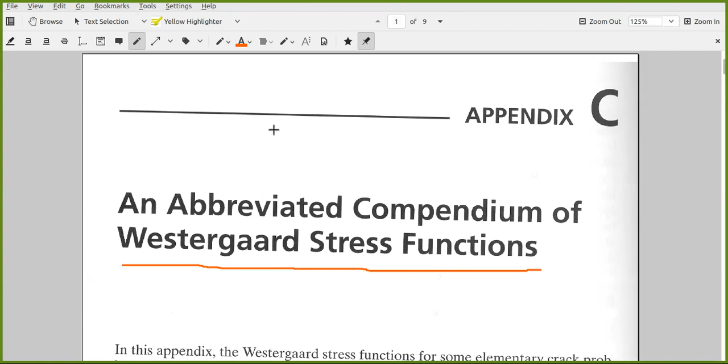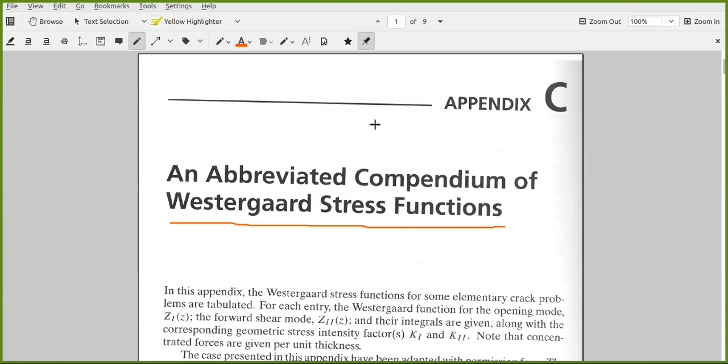There are solutions for different types of crack problems here, and you can use these functions to derive full stress fields. From the outset, we have talked about inverse method or inverse solution, and the functions were derived so that they satisfy the boundary conditions for appropriate Airy stress functions. And then you can use these to calculate stresses at all points in the complex plane. And certain idealized geometries are also included.

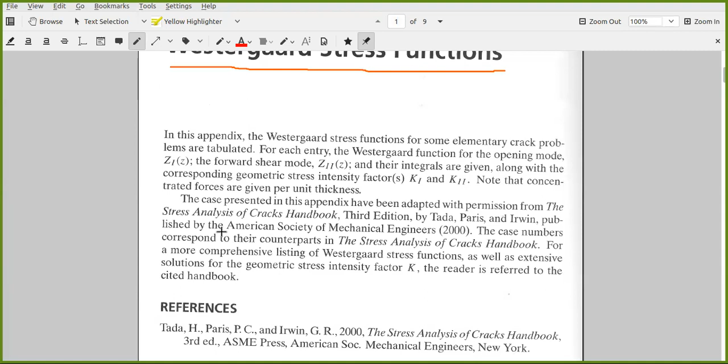It starts with this here, referred to as case 3.6. Again, an infinite plane containing a semi-infinite crack under crack face loading. Loads or forces per unit length are applied on the crack faces. They can be applied separately. For example, if Q equals 0, there is mode 1 loading. Crack face force here is P. And what's the Westergaard function for mode 1 loading?

It's given here, Z1 equals 1 over pi P times 1 over Z plus B times square root of B over Z. Now, this is sufficient. This single function is sufficient to find all stresses and the stress intensity factor at the crack tip and the displacements. In the homework, you will work on such derivations. But if P equals 0, then you have mode 2 loading, a shear force acting on the crack face, and the Westergaard function is Z2, and this Z2 will define, again, all quantities. All full-field quantities and asymptotic quantities, everything is known once the Westergaard function is given.

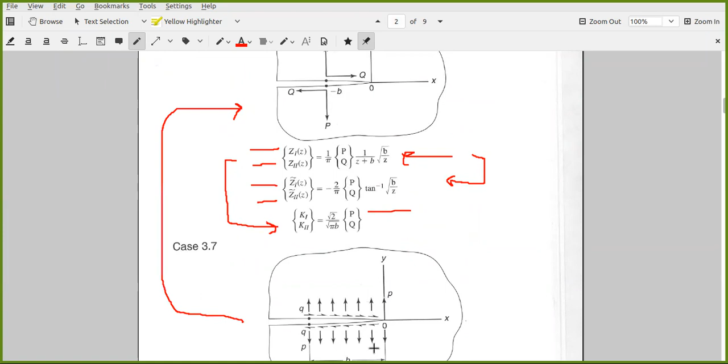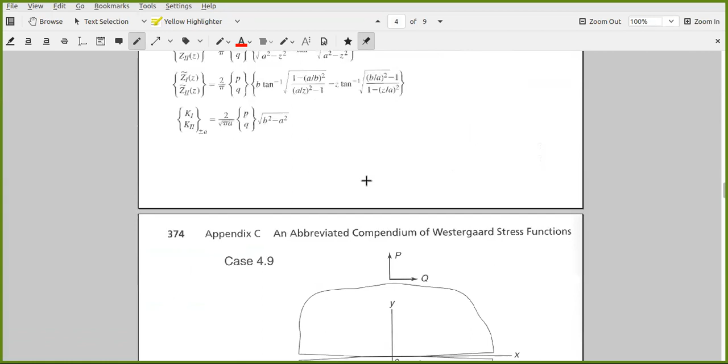And find these different cases, distributed loads. It's theoretically possible to find this case from this case, because it's a Green's function for this case, but distributed load multiple or double cracked specimen, let's consider the other cases, internal cracks. This is a crack under remote moments. That was the problem we have dealt with.

Crack in infinite plane, under normal stress or shear stress. If it's under normal stress, the problem is mode 1. If it's under shear, it's mode 2. Westergaard functions and stress intensity factors, sigma square root of pi a, tau square root of pi a. A basic problem in fracture mechanics.

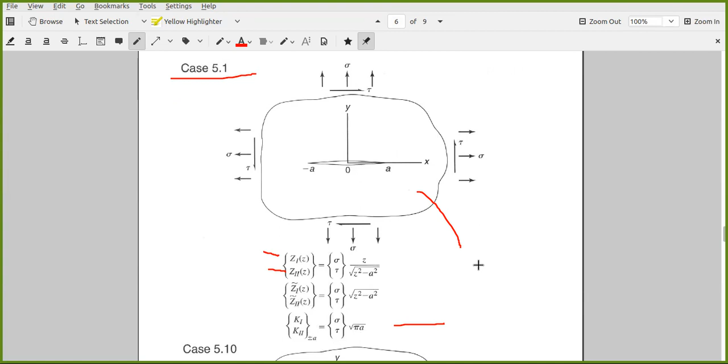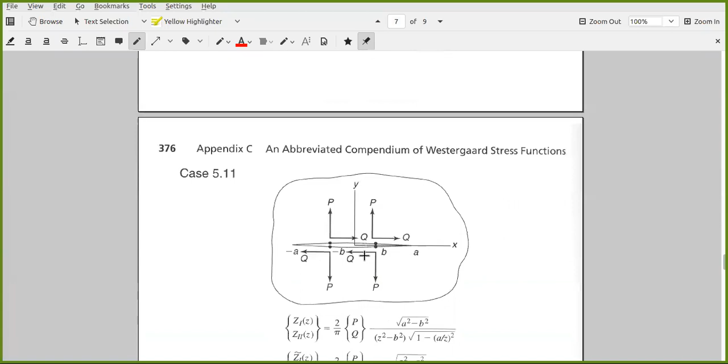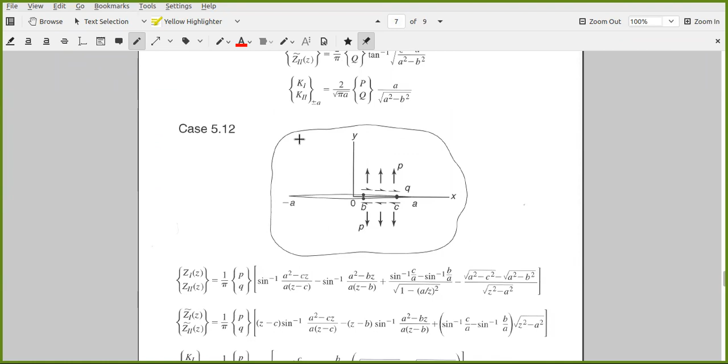Now, you can examine these other cases as splitting forces acting on the crack face. Double forces, this is in the homework. Distributed load on crack surface. These are crack surface loads. They could be useful in examining limit loading problems as well. If we have time, we can cover the Bueckner's principle.

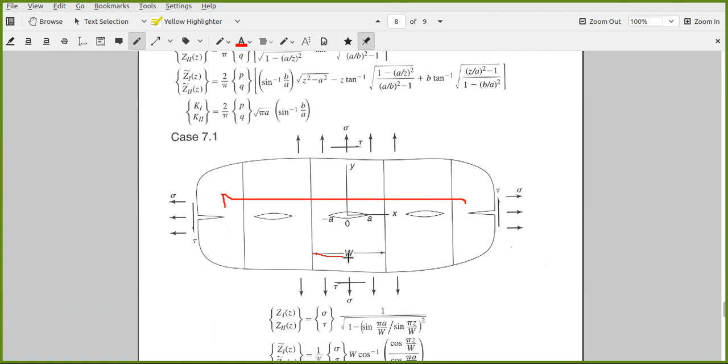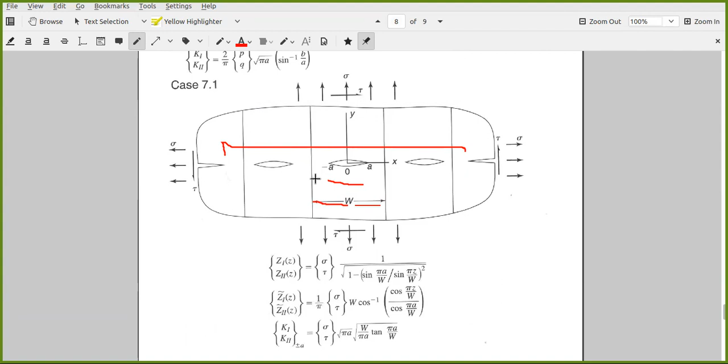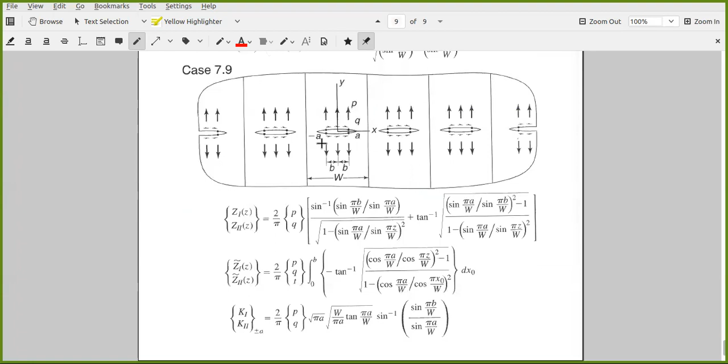Periodic cracking. This is periodicity W, full crack length 2A, and so the cracks are interacting here, and this will cause somewhat larger stresses and stress intensity factors. Periodic cracks with concentrated forces, and you can examine these yourself, given in the book. And if the Westergaard function is given, the good part is that you'll be able to find full stresses or asymptotic stresses, whichever you want.

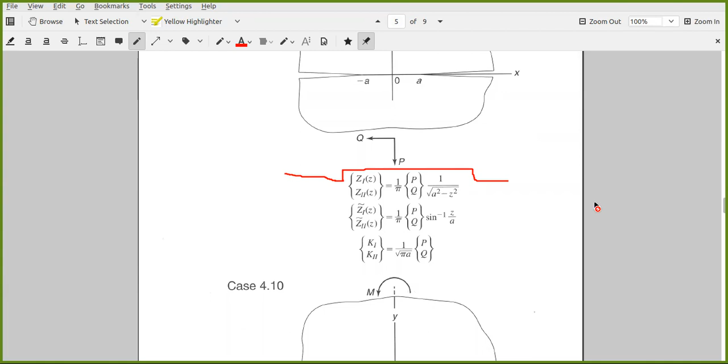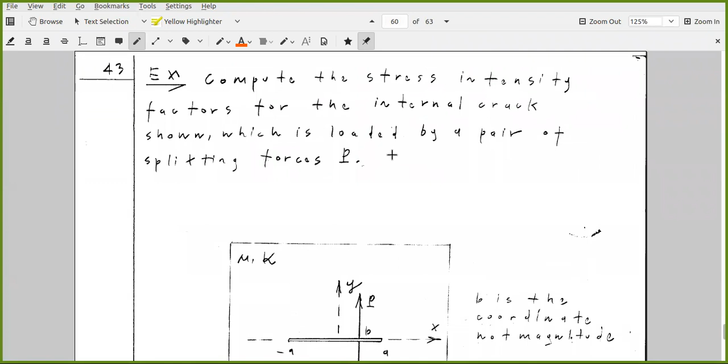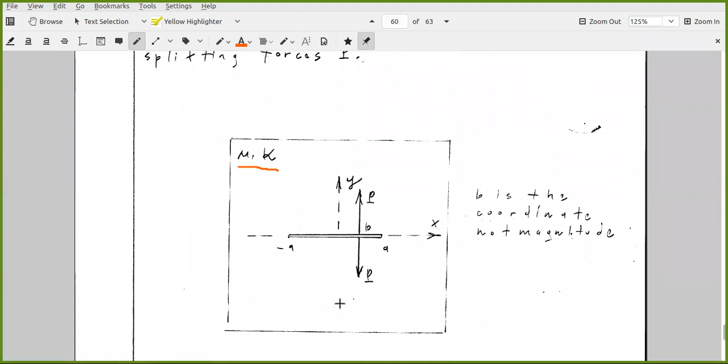An example on the application of the Westergaard method. An internal crack in an infinite medium. These are the elasticity parameters, mu and kappa, loaded by a pair of splitting forces at x equals b. B is the coordinate here.

Crack face loading, referred to as crack face loading. Concentrated forces are applied on the crack face. What are the stress intensity factors? That is the question. Derive the stress intensity factors.

But one thing you should notice at the outset: are the stress intensity factors equal to each other? Stress intensity factor at x equals a and minus a. Are they equal? That's the question. At the crack tips, are the stress intensity factors equal? They are not equal because the loading is not symmetric. Which means that you have to find separate stress intensity factors for a and minus a. And how can we do this?

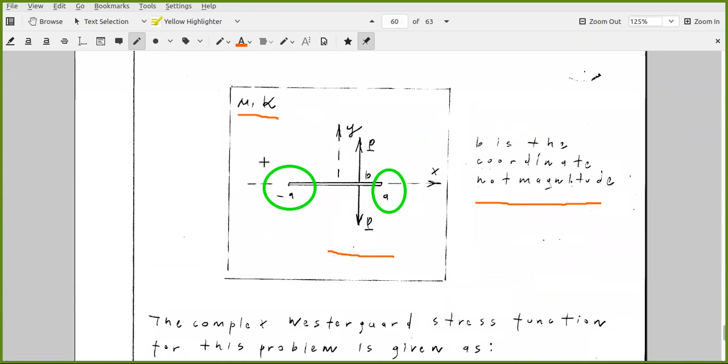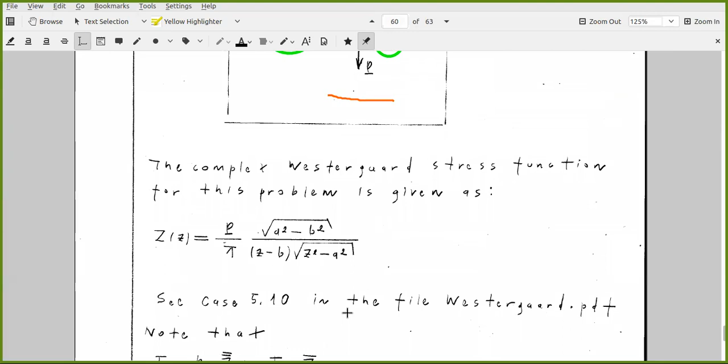For the inverse solution, this is case 510, not 511, not the double force, single force. Case 511 is in the homework. Yes. Case 510 in the Westergaard compendium of stress functions. And this is given, therefore, in the book by Sanford.

Let's choose the correct marker. The Westergaard function, Z equals P over pi, square root of a squared minus b squared, over z minus b times the square root of z squared minus a squared. This is available, and that could be your starting point for a mode 1 problem. We did all these derivations.

The stress function phi is real Z double bar plus y times imaginary Z bar. Sigma y was calculated as real Z plus y times imaginary Z prime. These are analytic functions defined in the material plane that is constructed as the complex plane. Now, it's necessary to know the stress distribution on the cracked plane, y equals 0. And we know how this is computed on the cracked plane, equivalent to the square root of x squared minus a squared for x greater than a, minus the square root of x squared minus a squared for x less than minus a.

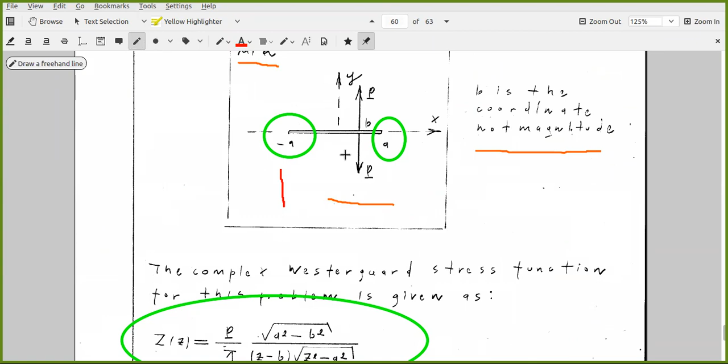Procedure: right now it's an algebraic procedure. Substitute this into the definition. Carry out the simplifications. And after a final simplification, you will find K1 at minus a. Stress intensity factor at a and at minus a. Now, what's the common feature here? If b equals 0, then they have to be equal, because if the splitting forces act at the origin, then stress intensity factors are equal because of symmetry, and you can see that by substituting 0 for b.

We can easily show that K1(a) equals P over square root of pi a. A somewhat simple result.

An interesting feature of this loading is that as crack length becomes larger, there is a drop in the stress intensity factor. It is not like remote loading. Stress intensity factor is getting smaller and smaller as the crack length becomes larger. Because the crack tip is moving away from the force, so that's probably the reason.

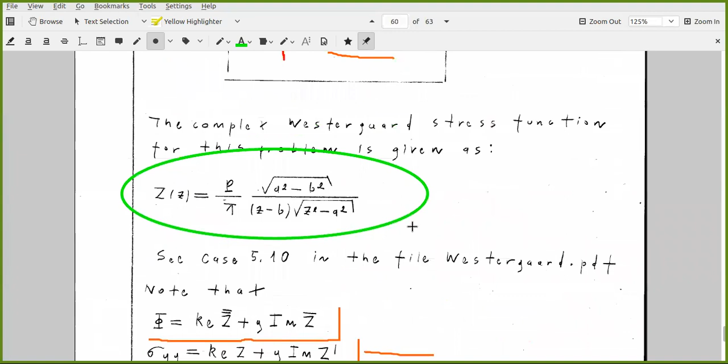Any questions about this derivation? And this shows that if for a certain geometry the Westergaard function is known, the problem is already solved, but you should know the relations between different unknowns to be able to find that solution. You can find either full field or asymptotic representations. You can find the stress intensity factor. And the most important variable in the whole problem is the stress intensity factor, as we will see later.

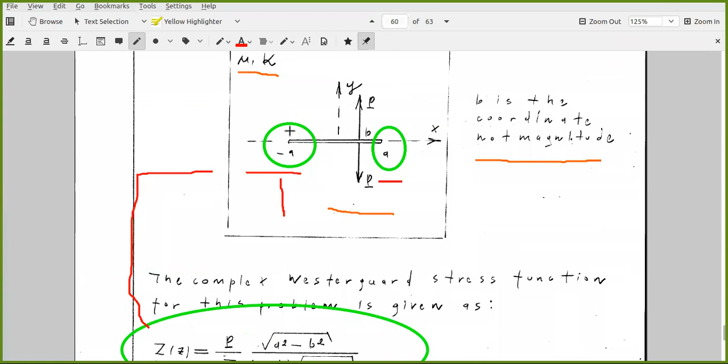That was an example or illustration for the Westergaard stress function. And another case, or an extension of this definition: keep in mind this geometry of an internal crack loaded by these concentrated forces. And the question is, can I solve the same problem for a distributed load?

I can see the similarity between these two. Here we have the same geometry. The crack is in an infinite plane, but instead of concentrated forces here, it's loaded by a distributed force. And can we derive the solution for the distributed crack face loading, or an internally pressurized crack in an infinite plane, by using the concentrated force result? That's the question.

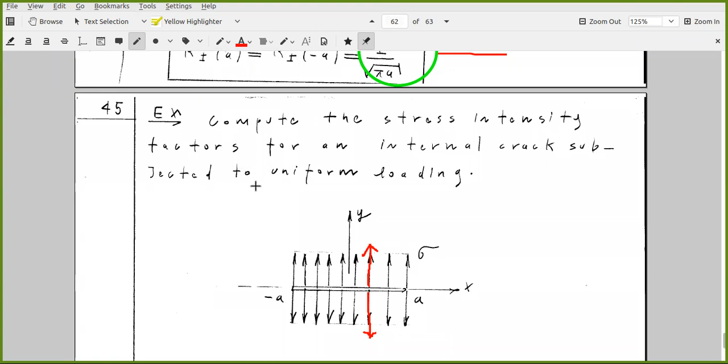And it's of course possible because the concentrated force solution is referred to as Green's function. If a Green's function is known, the solution for distributed loading can be derived by integration. Well, it is going to be a matter of integration, because over an infinitesimal zone, you can find a concentrated force resulting from this distribution. Shown here is the crack under distributed load over dx.

Then forces acting on the crack are dP on both sides, and dP is sigma dx. I can integrate the stress intensity factor due to sigma dx. So find the stress intensity factor due to the whole distribution. And how is this done?

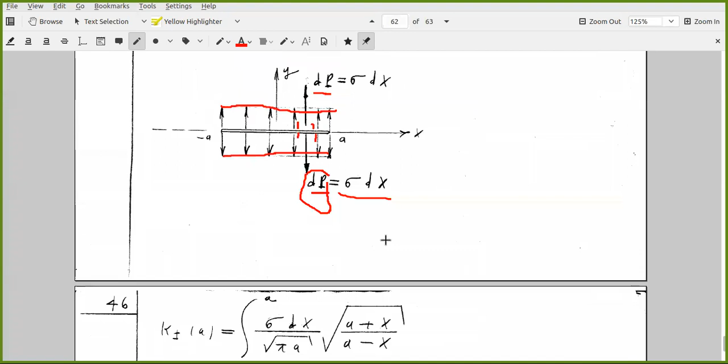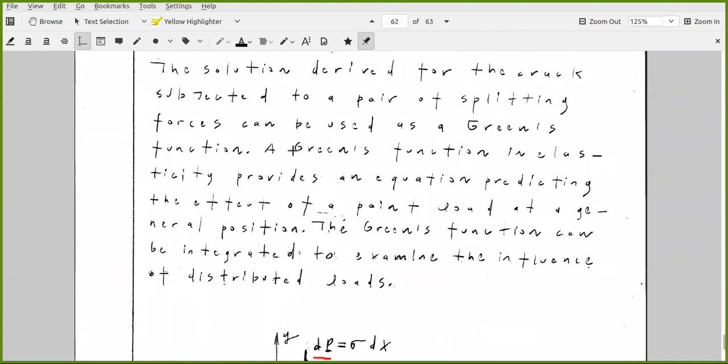Replace force by sigma dx in the original result: sigma dx over square root of pi a. Crack length is not changed, but b now becomes the coordinate of the concentrated force. This becomes the new x. I replace P by sigma dx and b by x. And then integrate it from minus a to a, because this is dK1, the differential of K1 because of sigma dx, and can be integrated from minus a to a to find the stress intensity factor. Therefore, we have an integral whose integrand is given by the Green's function.

And this integral can be calculated. Just move these constants through the integral sign, sigma over square root of pi a. The resulting integral is from minus a to a of square root of (a plus x) over (a minus x) dx. This is a problem from calculus. This integral can be found by trigonometric substitution, but I am not going into the details. The result is pi a, and I have also found the result by Maple as well. Symbolically, you can integrate it by Maple or MATLAB. It's pi a. Therefore, substitute pi a, and you will end up with this result, the familiar result.

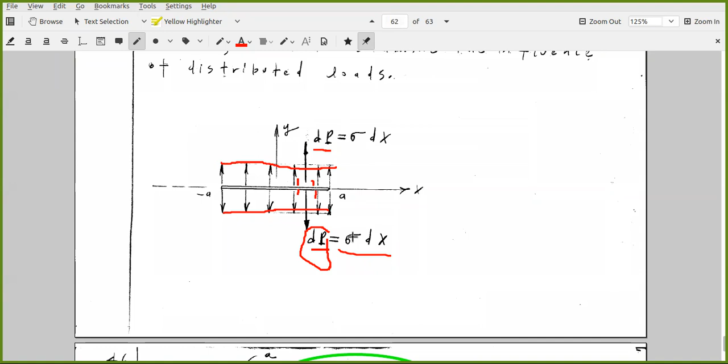And this is the fourth time, I guess, we are ending up with this familiar result, sigma times square root of pi a, stress intensity factor. This is another important problem. A crack internally pressurized with sigma, and the stress intensity factor for this crack is sigma times square root of pi a. Its stress intensity factor for this case is equivalent to the stress intensity factor calculated for the crack under uniaxial loading. This is uniaxial loading. The stress intensity factors are the same.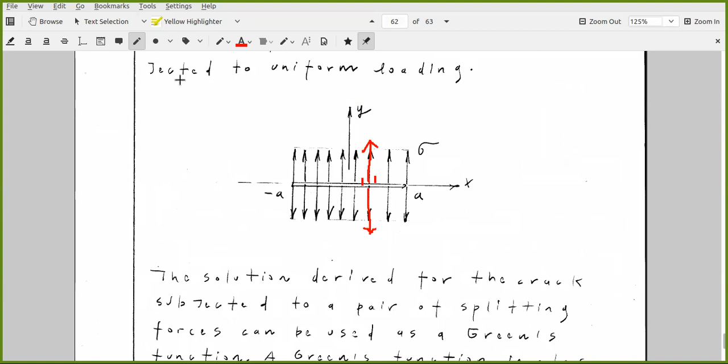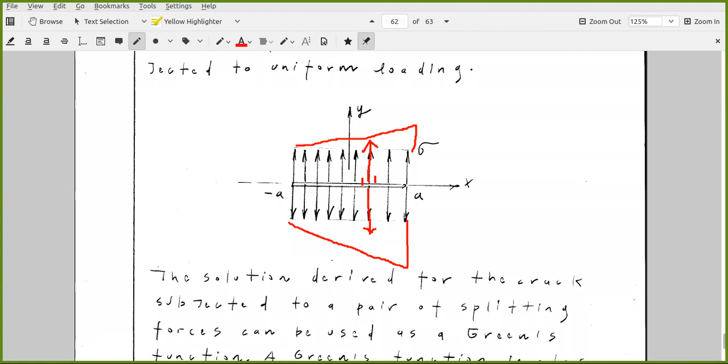Green's function approach for the calculation of the stress intensity factor, and this approach is applicable for variable loads as well. The load could have been variable like this, a linearly varying pressure acting internally on the crack surface. The method is essentially the same, however, the integrals are different. And this is the method for the application of Green's function.